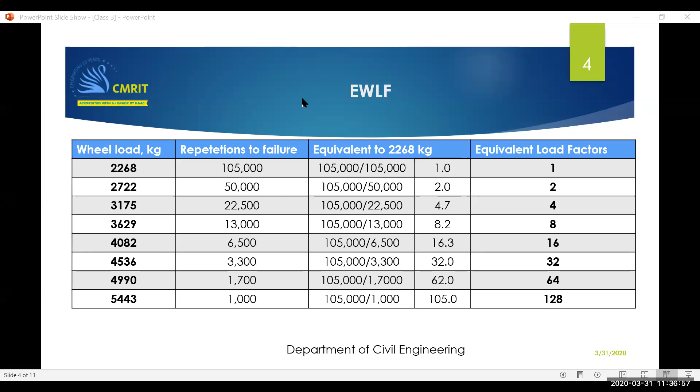Please write down this question. Students have already attended the class - 9 students, please excuse me. It's a very important topic from the examination point of view, that is why I would like to highlight it again. I'm repeating it for you alone, so please ensure that you do it.

So Sohe, Purnima, Vaishnavi. Dakshit, Darshan, Naveen. Next.

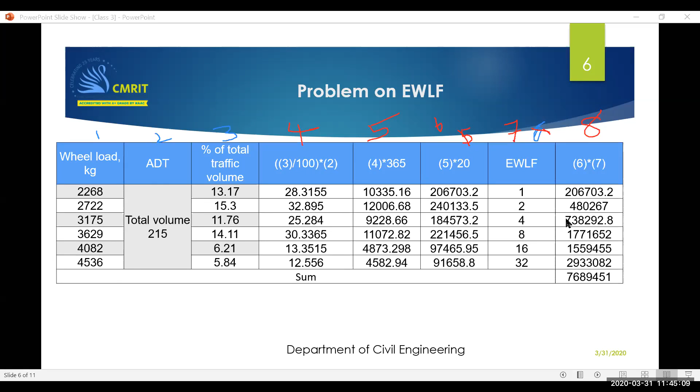Please note, you don't have to find out all these numbers. Using a calculator, you can just multiply all and get the 8th column. You don't have to, because I did it in Excel, that's why I copied all the things. You can just multiply the entire thing. Okay ma'am.

Upsar is here. Abhishek? Abhishek, are you here? Abhishek?

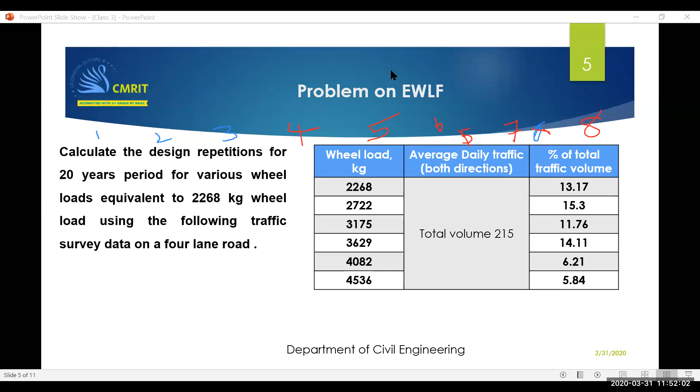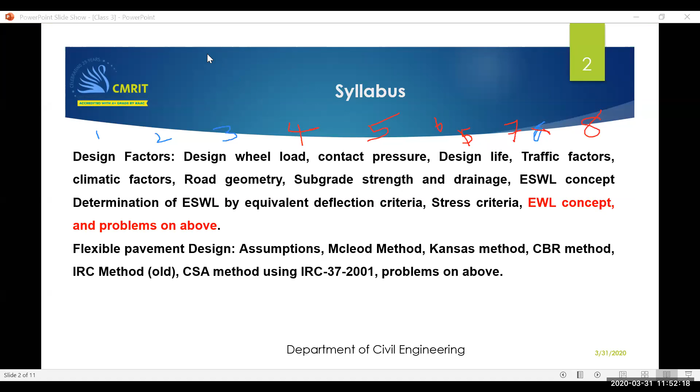Pandit is here. Anand. Shalini KV, yes ma'am, Shalini KV. Present ma'am, sister, Shalini KV is there. Yes ma'am, yes ma'am, what's your name? Shalini KV only, ma'am. Yeah, Shalini KV, Shashank Reddy is not there, right?

Shravan Kumar. Where is Shravan Kumar? Syed is not there today? Syed? Syed.

Ayyappa? Mustafa? Nageshan? Naveen is there? Shivraj? Ma'am, Mithun, ma'am, Mithun is there? Okay. Ma'am, Sudhakar, ma'am, yeah Sudhakar, Shivraj. Vaishnavi, ma'am, yeah Shivraj, present ma'am. Vaishnavi is there, Sudhakar is there, Shivraj is there? No, Sudhakar is ma'am present, ma'am. Darshan, Sudhakar is there, Naveen is there, Shivraj. Jidesh, ma'am, Darshan, Darshan is not. Venkatesh and Vijay, hello, yeah.

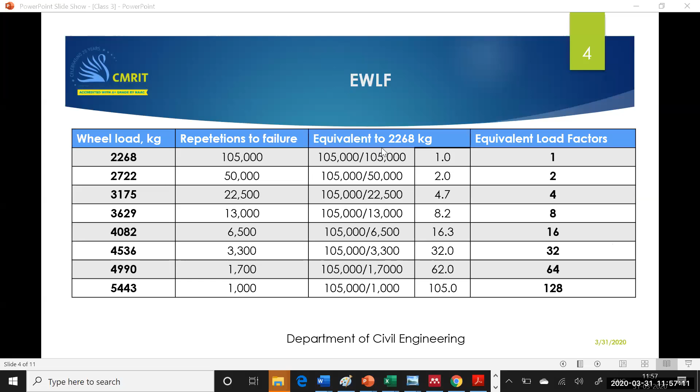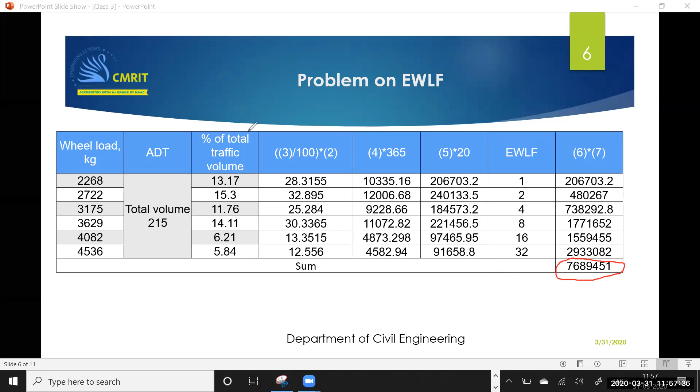Yes, yes ma'am. So this is the value which is for a 4-lane road. So to get it for a single lane, what do you have to do? Because it's a 4-lane road, divided by 4. So per lane, if you want to calculate, it has to be divided by 4.

But it is going to be divided by 4. Is it clear? Is it clear? Yes, ma'am.

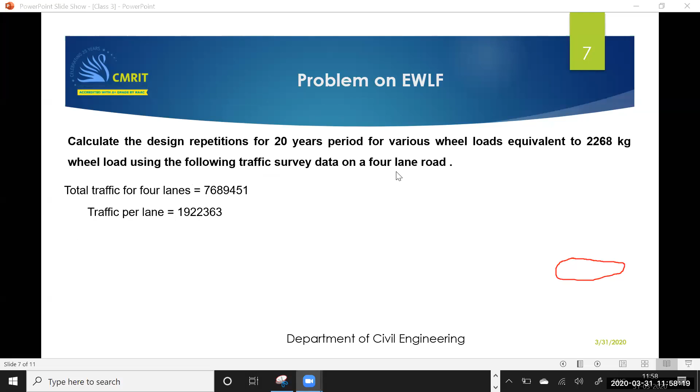Please note, so this is your syllabus. Are you able to hear me? Yes ma'am, yes ma'am. So in your syllabus, you have the first part. Now flexible pavement design, assumptions, all these things are coming continuously, being done.

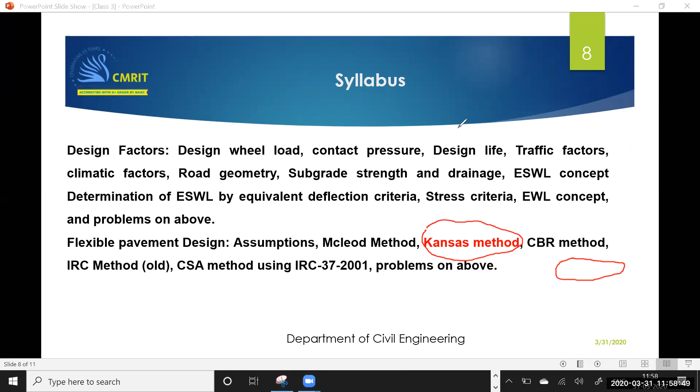Now we will go on with the next one, which is nothing but called the Kansas method. Okay, we will deal with something called the Kansas method now. Now, what do you mean by this Kansas method? Please listen.

So please note, it is also called the triaxial method. Please listen, listen here. So, L.A. Palmer and Barber, it's very, very important from the examination point of view. Please keep noting down in your notes also if required.

So Palmer and Barber in 1940 proposed a method of pavement design based on the Boussinesq equation for a single elastic layer. Okay, we all know that the Boussinesq equation is basically meant for a single layer. So here he tried to propose an empirical equation. So I will not say purely it is an empirical equation. I can say that it is a semi-empirical equation, because he is trying to use the value from the triaxial test to design a pavement.

Are you able to hear me clearly? Its voice is breaking, ma'am. Yeah, are you able to hear me clearly now? Are you able to hear me? No ma'am, no ma'am.

No, ma'am, your voice is breaking. Just a minute. Yes, ma'am. Now are you able to hear me? Yes, ma'am. Now please look here.

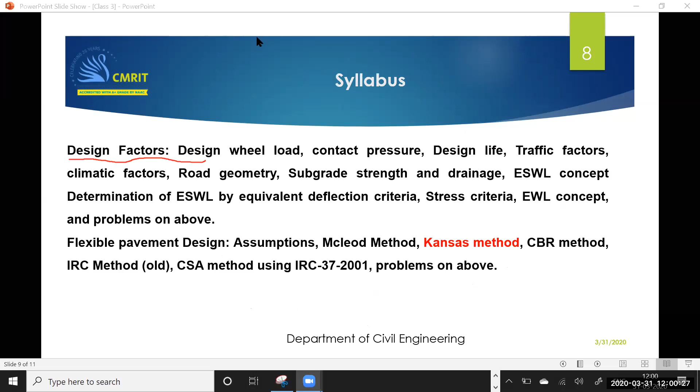Now please look here. Palmer and Barber proposed a method for pavement design based upon the triaxial test results. They proposed an equation given by 3P divided by 2π Es delta, squared, minus a squared is equal to thickness of pavement.

Okay. Now this equation, you can actually derive, because this is based upon your Boussinesq equation. Probably in your applied geotechnical engineering you have studied this. So from that equation, based upon rearranging it, now what is P?

P is the load in kilograms, E is the modulus of elasticity, A is the contact radius, and delta is the deflection given by 0.25 centimeter.

Are you able to hear me? Yes, ma'am. Now tell me, what is the input from triaxial method? What exactly? In the triaxial method, we generally have a tendency to graph, right? So, for example,

Hello? Ma'am? Have you taken down the equation? Ma'am, you haven't called out my name. Mr. Syed. Who is it? No, ma'am, Darshan. Darshan, yes ma'am. Darshan, I marked your attendance. Ma'am, even mine. Thank you, ma'am. Purnima, yes ma'am. Yes, I have done it.